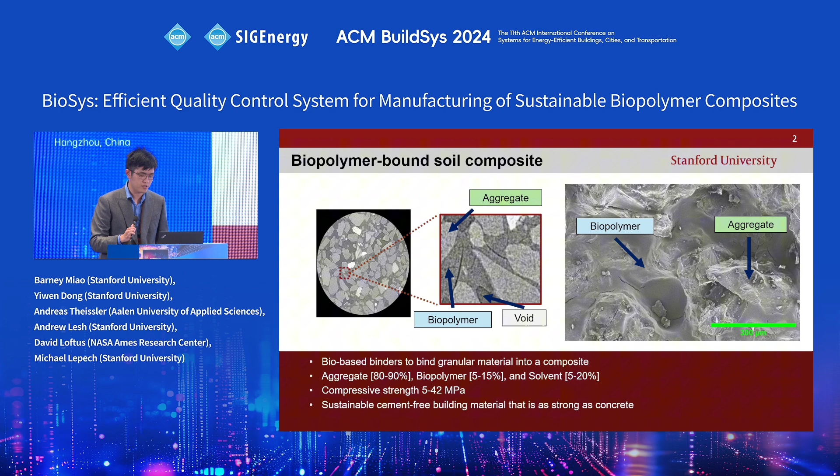But the one main benefit is this material does not use any cement and uses total waste products in its production. So the resulting benefit of using these carbon-rich waste biopolymers is you effectively sequester carbon, hence you will have a carbon-negative building material. Although this sounds extremely attractive, there is one issue not solved by this material family so far, which is the development of quality control methods to help ensure consistency in manufacturing materials.

Quality control is very essential for the structural health of the eventual building that you create. Some existing structural health or quality control methods include, imagine if you're shopping to solve this problem, you keep filling your shopping cart, some vision-based methods, some acoustic-based methods, and even rebound hammer or other types of non-destructive testing methods in material science.

If you keep filling up your cart, imagine if you want to cut your grass and I tell you you have to get 5 tools or so, you'll be like, oh no, this seems unnecessarily difficult and not really practical in a large-scale manufacturing scheme. So one thing about BioSys is it's a single-hand system, so you only need one system. And unlike previous ones, it is uniquely tailored to this material, which has very special, unique development processes that I won't get into too far. It's not a materials conference.

BioSys itself is a vibration-based quality control system. It's multifunctional, efficient, and easy to use. And BioSys, unlike many quality control methods, focuses on the initial health or initial fabricated mix design. So if you could determine if your initial mix is not appropriate, you could potentially salvage it and prevent waste or have less waste from manufacture.

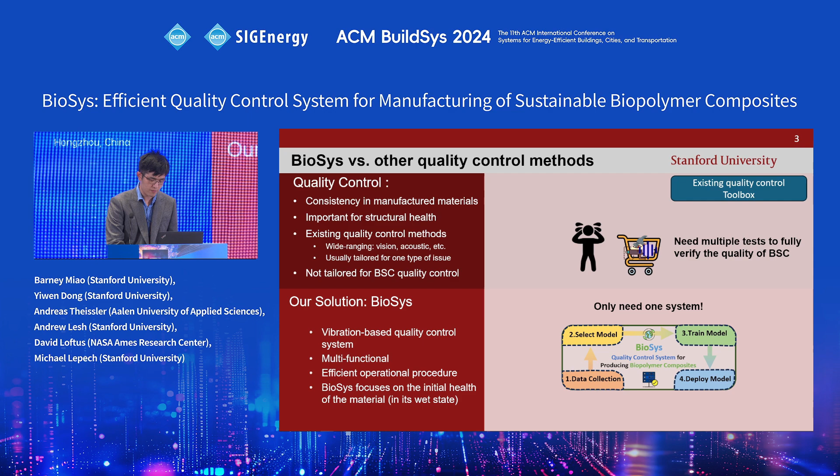For a quick overview of BioSys, I'm going to go a little more deep in each one. We have 4 pillars supporting the system. The first pillar is your data collection. In this case, you have a BSC sample, a biopolymer-bound soil composite, abbreviated BSC. You check the quality, which involves measuring impulse and response data.

Once you've saved it, depending on what type of model you want to use, there are 2 models or methods we have developed. A quick model called an ExFeat model, which is much simpler and only uses 8 features to train, and a TsCheck model, which uses more complex time series classification models to train. Once you choose your model, you can then train your models and finally deploy them for either strength gain, monitoring the development of the material, or also the initial health.

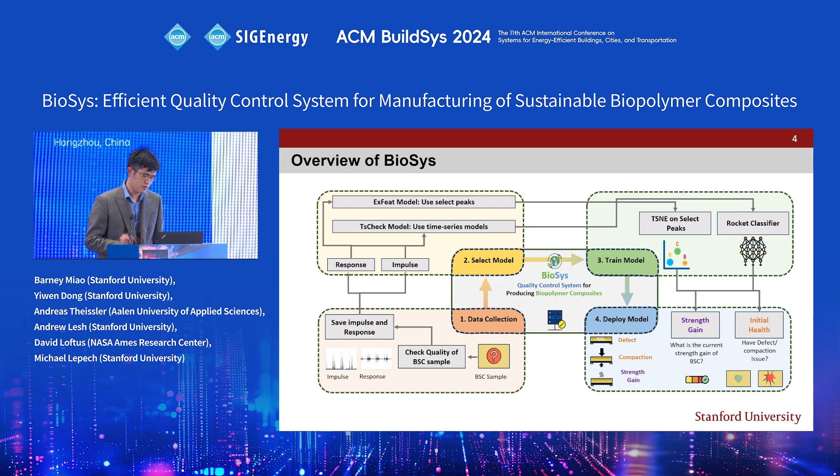So for some type of investigated specimens, I actually brought a specimen with me. It's not a brick. It was hard to bring a brick on a plane across the world. So in order to not bring a brick, I brought a small cylindrical sample so you could come up or come to me later and see what it looks like.

In this case, back to this, BSC samples are normally manufactured through double-sided compaction. So you imagine you have a sample in the middle, you compact one side, flip it, compact it again until you reach this stress level. For all these samples, we have the same dimensions, but for the control sample, there's no simulated defect, but for the other ones, you can imagine you're embedding a defect or simulating one in the middle. And we have simulated some high-density defects and low-density defects.

Those are typical from mixing issues where you have some clumping of biopolymer, for example. And you also have regions of significant debonding and shrinkage cracking, which is very important and prevalent in material development. So we try to capture a wide range of defects in our study, which is very prevalent in any material development. So we have 8 types of defects versus 1 control sample.

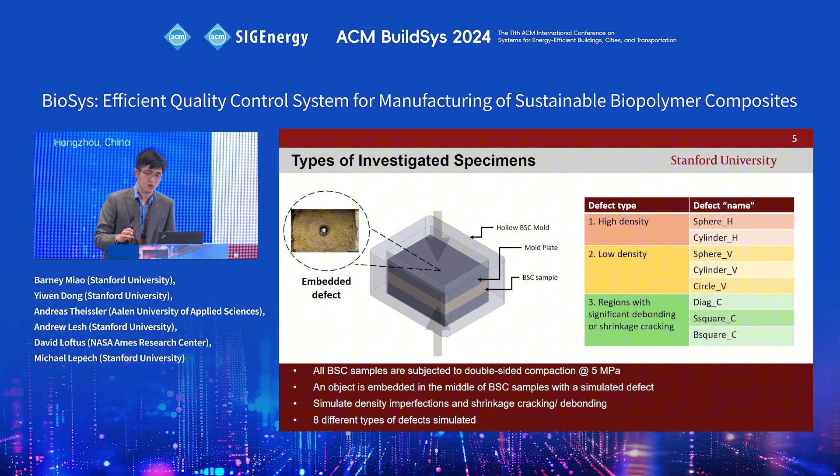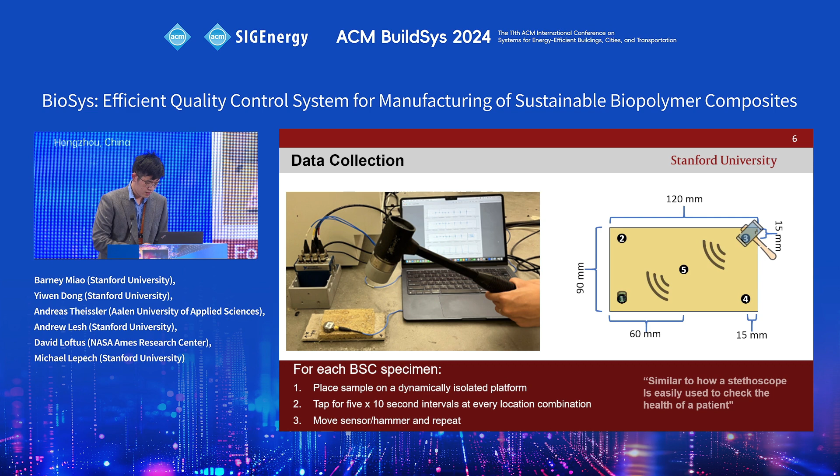So for our data collection, you can see here the BSC sample is mounted on a dynamically isolated platform, so it's separated from the ground. And in this case, for each sample, you would imagine if you put your sensor in the bottom left corner and you tap on the top right corner, you basically would tap this for 5 continuous 10-second time intervals to collect your data. And you would repeat this for every sensor and hammer pairing over the specimen. That's how you would collect the data.

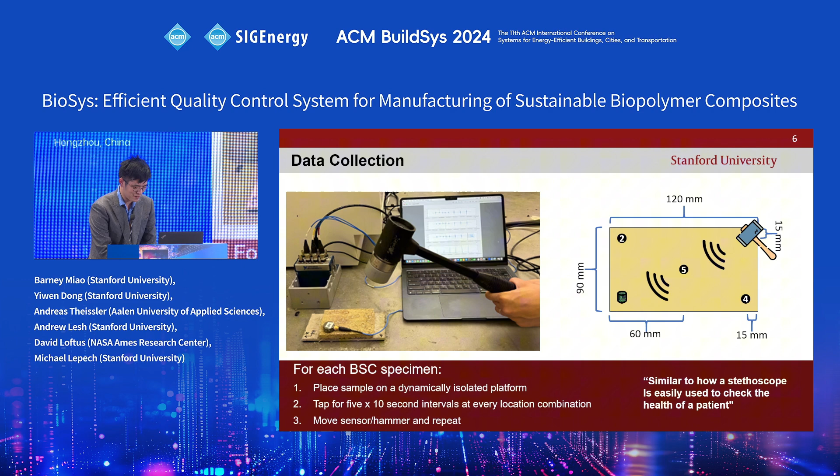And you can imagine it's very simple to use. You simply attach your accelerometer and tap. And it's very similar to when you have a medical checkup with a doctor. If they check your heartbeat or anything, they just put a stethoscope and listen in. I don't know if there are medical people here, but one of our collaborators is a medical person. So the doctor reference is this. So that is our analogy here.

So once you collect the data, you essentially have the hammer impulse as shown on the top with the individual impacts, and you also have the response that you measure for the 10-second time interval. For all of them, they might look very identical, and essentially what we do here is we segment them into individual subsequences based on the individual hammer taps. So you could look at individual responses and zoom in and see the features there.

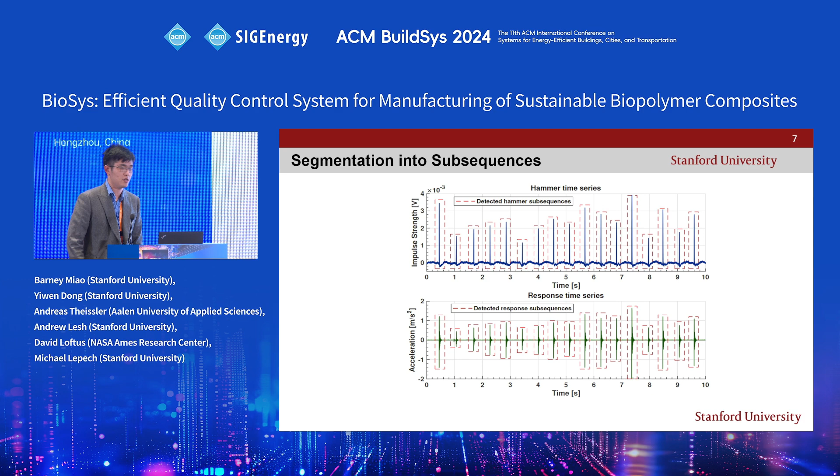Once you do that, how do we solve the problem? For our model selection, for our ExFeat model, which is our simple model or quick and dirty approach, we select the first minimum and maximum peak locations and amplitudes. So if you select them, you eventually have 8 features you're considering, which can further be compressed into 2 dimensions using t-SNE. So this is a very quick approach that takes only a few seconds to train, typically less than 10 seconds.

For the TsCheck model, it's a little more complicated, and in this case, we tried a few time series classification models, and in the end, we used a ROCKET classifier, which uses up to 20,000 dimension features. It is a little difficult to plot 20,000, so you could imagine there are many peaks and amplitudes and other features we're considering in this model.

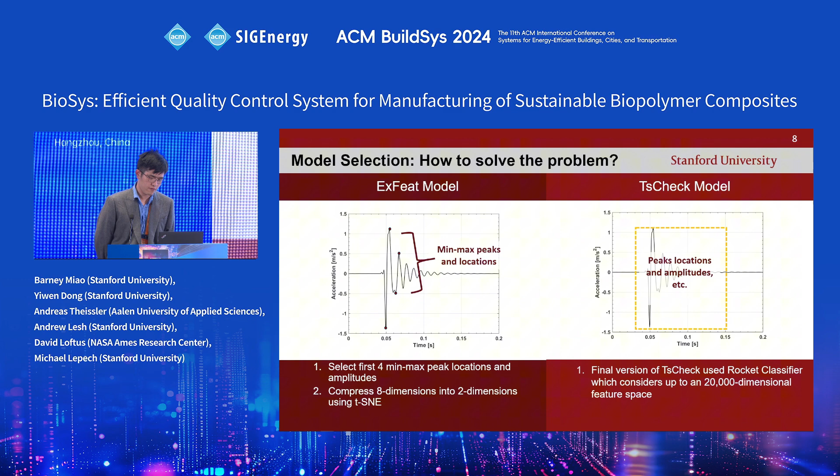One other challenge to note is because we are manually applying an impulse on the specimens, there is a variance in terms of the hammer amplitude or impacts per tap. So in order to account for those things, or it'll be pretty bad if you don't, for the ExFeat model we do a filtering approach where we look at the amplitudes of the force of the impulses. And in this case, we would filter out based on if the impulse is within 10% of the mean force that you measured.

When you do that, you filter out approximately 80% of the subsequences, which has some issues in terms of potential data imbalances when you train. So that is one issue of this approach, but it's the quick and dirty one. And in our more sophisticated model, that is much better.

In this case, we would then just do a scaling approach where for each type of hammer impulse, you would just scale the response based on the hammer amplitudes. And in this case, you would keep all your subsequences, so you have a lot more data for your training.

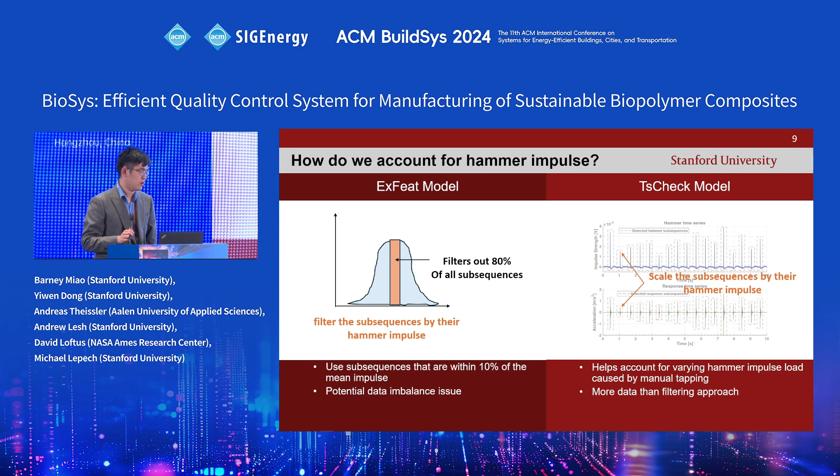Now for the deployment of the model in action, BioSys for defect detection for the 9-class accuracy currently has an accuracy of around 70% for the ExFeat quick and dirty approach, but for the more sophisticated model, it's around 98%. That's a very good performance. And if you didn't really care about what type of defect your specimen had, if you just wanted to know, is there an issue with my wet mix? You would basically have a two-class accuracy, so you just change all the previous X's into reds.

And you can see here a clear distinction between a proper biopolymer composite and one with a simulated defect. In this case, you can see ExFeat has an accuracy of up to 80%, and for the TsCheck model, you have an accuracy of almost 99, and that is very good performance that we had.

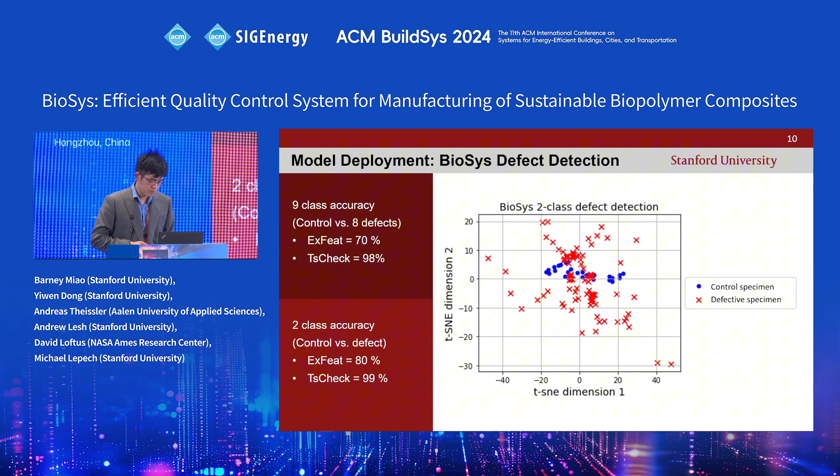Another thing I want to show you, I didn't show the compaction thing for time considerations, but in this case for the strength gain, another benefit is that this material, unlike concrete, which undergoes hydration chemical reactions, when you have your solvent in the wet mix, basically hardens through an evaporation process called desiccation.

Typically in the field, you would measure this on a mass loss basis, so you will weigh your samples, but this is not really convenient for samples that are too large, where you can't weigh them anymore, or if they're in a specific dimension where you can't weigh them. So in order to solve this issue, the BioSys system can also be used for strength gain monitoring.

The image shown here is a computational model showing how desiccation occurs, and you can see a drying front or crust forming that shrinks continuously into the material. But how does BioSys perform? Well, in this figure, the BioSys classification for ExFeat had accuracy around 77%, and the other one had 100%, and although it's 100%, if you looked at it as a regression problem, it's not really 100% perfect, but it's pretty much along the expected theoretical strength gain formulation.

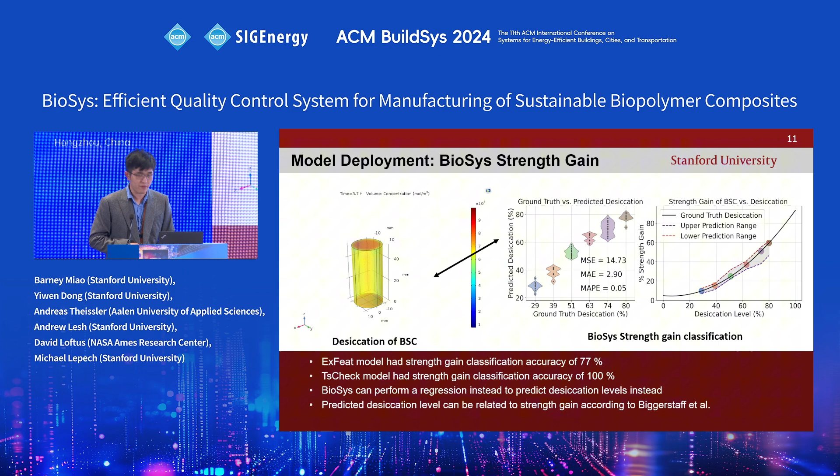If I wanted to put this whole presentation as a 1-minute speed talk, there are three key takeaways. The first one is that BioSys is a simple quality control tool that could monitor the health of your sustainable materials. The TsCheck model, the more complicated one, has a higher accuracy, sometimes up to 99, 98. But it needs a little more time to compute, probably a few minutes instead of a few seconds, so depending on how fast you want your results.

And if you just want a rough guess, there's multiple methods you can use. And also, BioSys can relatively quickly detect and track the strength gain and defects with relatively high accuracy. So these are three points to take from the presentation if you're sleep deprived or anything like that.

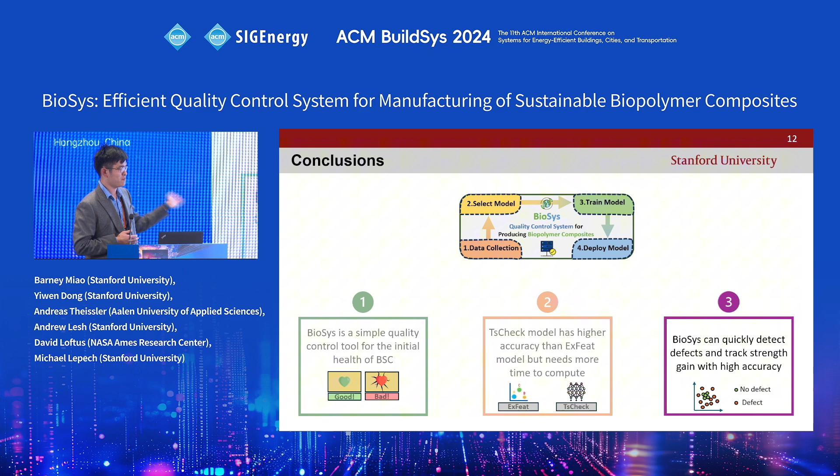I'm from Canada, so we pronounce it differently.

You could invent your materials, and once you develop the material, well, it's great news, but there's so many other considerations to do. So my research also involves some life cycle assessment, which would help guide the development or design of these materials, along with some microstructure modeling or microstructure analysis, where you look at characterization of the material, along with some modeling considerations.

And also, even if you invented a very good carbon negative material, you would still have to consider the end of life use of it. So if you were to simply throw it away in a landfill, that's obviously not a good idea. So one thing that we look into is how you could basically recycle these sustainable biopolymer composites and further reduce waste in that regard. So you could transition towards circular construction.